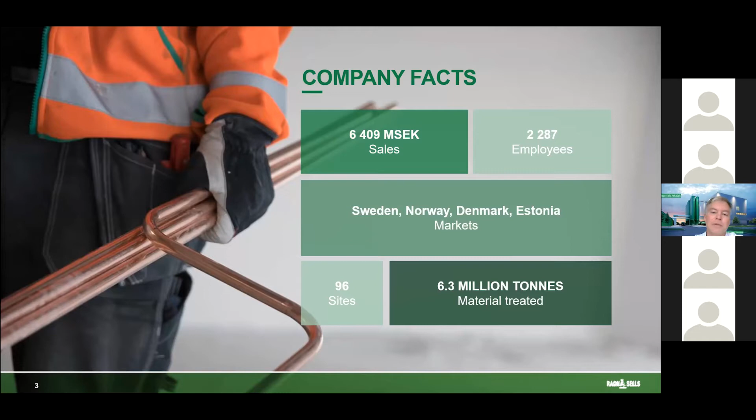Some quick company facts. We have a turnover of some 600 million euros, 6 billion Swedish kronas. We are active in Sweden, Norway, Denmark, and Estonia, and we handle some 6 million tons of materials each year. We do lots of stuff. We are operating landfills, we are collecting waste, we are recycling paper and plastics and all that sort of stuff, and working with hazardous materials in general, really.

We are working with a few basic principles when we are developing our technologies. We need technologies that really reduce the need for use of virgin resources. And we also want them to decontaminate the circular flows. We have lots of stuff in circulation that we need to take out of circulation. So the waste or incineration business is really the kidney of the system. That's one place where we can take out unwanted stuff. And we also want our solution not to push any debts to future generations.

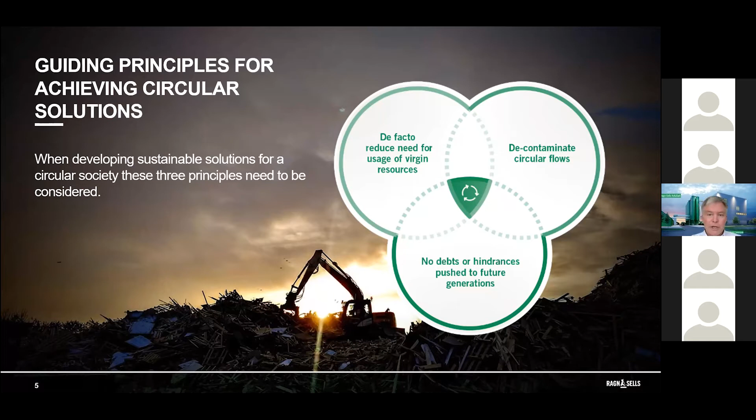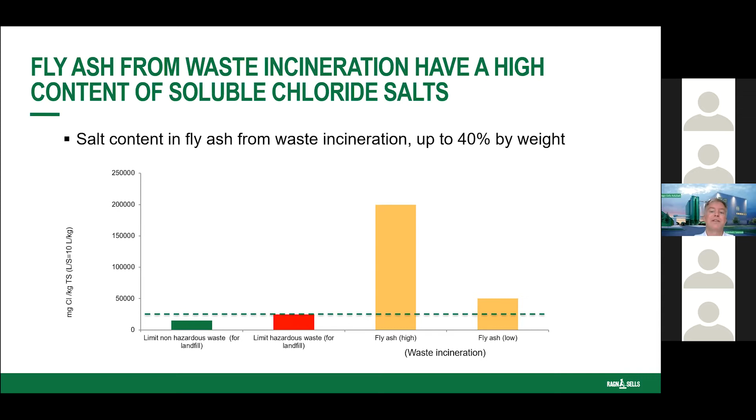As you know, one of the problems with fly ash from waste incineration is the high content of salts. On the left here, you see the staples are the limits for landfilling of hazardous waste in Sweden and the European Union. And the yellow staples are actually the salt contents in some of the ashes. So this is, of course, a big problem, but also a possibility if you like to recycle stuff.

The challenge that we had to overcome is we have a big site west of Stockholm, Högbytorp. It has a good location for ash treatment since it's in the middle of quite a few incineration plants. But we have a freshwater recipient, so we can't discharge any salty water or any other contaminated water, of course, into this water body. So we chose to focus on the chloride salts rather than the heavy metals. We needed to create an off-site solution to meet these needs of our customers. Most of the plants are maybe too small to have an on-site solution, or they don't have enough space to have one.

And we also needed a technology. Since we are not ash producers, we needed a technology that can handle a different feed of ashes over time, since we are subject to public tendering. I mean, the contracts come and they go away and the ash mix is changed. Also, our customers change their fuel mix, and maybe changes in the flue gas treatment technologies due to regulations and other demands will change the quality of the ashes. So we needed a very robust technology.

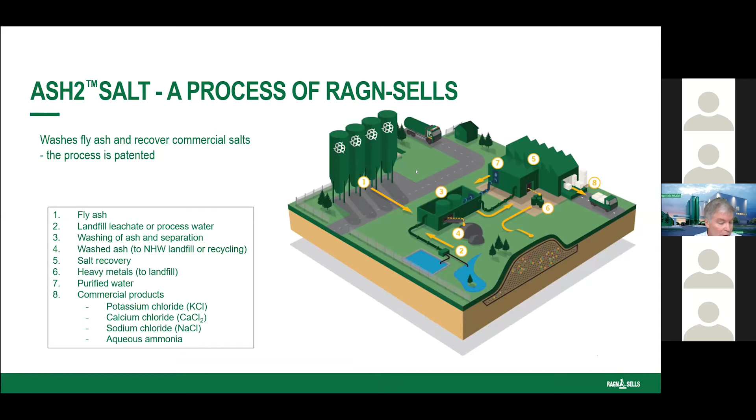Simplified process. The first step is the actual ash washing, the washing of the ash. We wash with water. It's a high pH process. In this step, it's a well-known technology, and we have also teamed up with a very experienced partner in this. I'll come back to that. And we produce the ash residue, the washed ash, so to say, and then we take out some of the contaminants to make the next step possible.

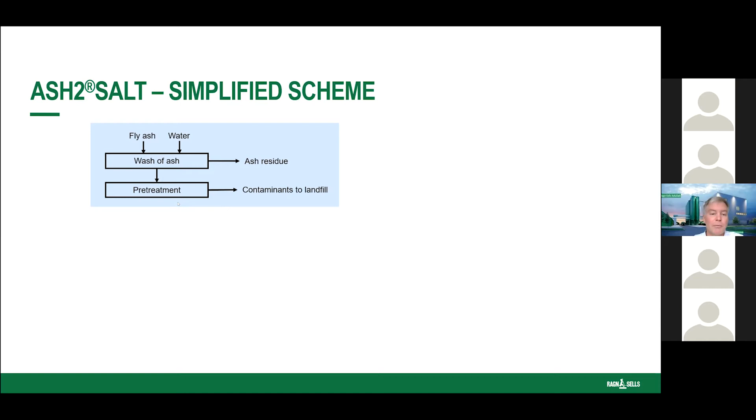Next step, we come to the first of the ash to salt operations, and that's evaporation of this pre-treated brine.

That was a hard sentence. I need to take some water.

This is the evaporation step, and in this step we create ammonium sulfate, and we also separate calcium chloride. And how do we do that? We do that by using the fact that in the mixture, the calcium chloride and the sodium chloride and the potassium chloride, which are the 3 main salts in this brine, have different solubility in each other at different conditions. So we can use that in a very ingenious process that is patented by EasyMining.

And so we can separate the calcium chloride, and on to the next step, we have a mix of potassium chloride and sodium chloride. So once again, we use a solid liquid separation cycle, also taking advantage of the fact that these salts have different solubilities under different conditions. And that's really the process. There's lots more to it, of course. But this step number 2 is the only evaporation operation we have, and thus it's very energy efficient.

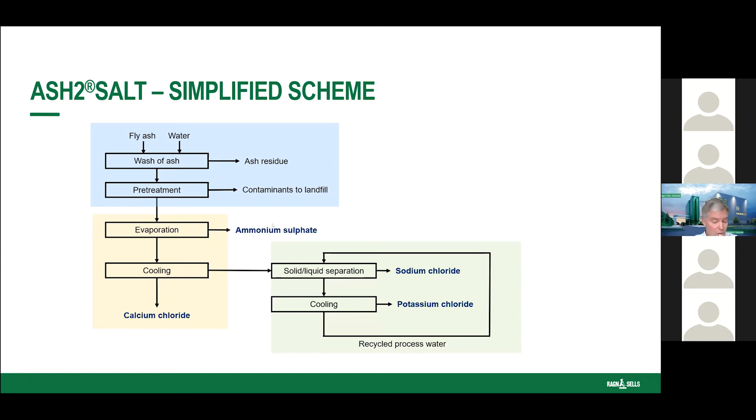What do we produce? We produce, of course, lots of ash wash residue, which could be landfilled as a non-hazardous waste under EU regulations, or it could be used, hopefully, as a process chemical in some industry. The potassium chloride could be used as a fertilizer, of course, or maybe some industrial chemical. The calcium chloride is mainly used for roads, dust control and de-icing.

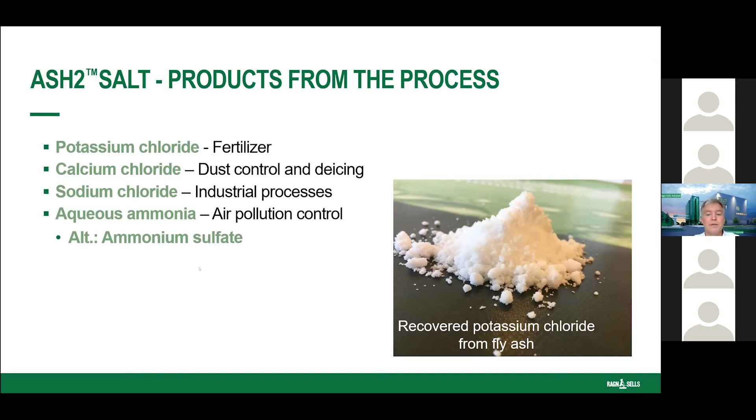Then we have the sodium chloride, also used for roads, but we are aiming for industrial processes, a bit more noble use of this very pure sodium chloride that we produce. And then we have the aqueous ammonia or ammonium sulfate, and that's a good story. We can recirculate some of this back as air pollution control agent to the plants that produced the ashes. We also established a partnership with a very experienced and competent partner in the salt market to help us market the salts from this plant we're building.

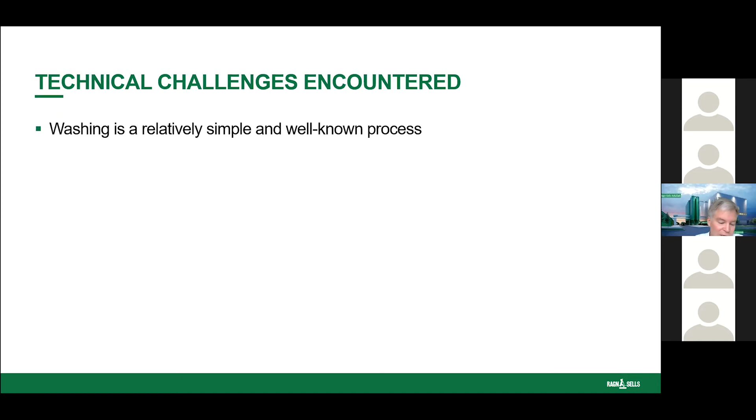Michael gave me a few specific questions to focus on. I think I already answered most of them, but I'll repeat for clarification. The first step, washing, is quite simple and well known. And we have teamed up with the partner Hitachi Zosen Inova, which has massive experience from washing of ashes, and is also the name behind the FLUWA technology that will be presented later. So the technical challenge was the salt splits, as we didn't find any that met our needs. And this was the main challenge, to invent the energy efficient technology.

I don't think energy will be cheaper in the future, and use of waste heat will come at a price. There will be no waste in the future, hopefully. It's only one evaporation step, so we use the saturation and crystallization cycle instead. So that's energy efficient. We didn't want a technology that needs lots of chemicals, hardly any actually.

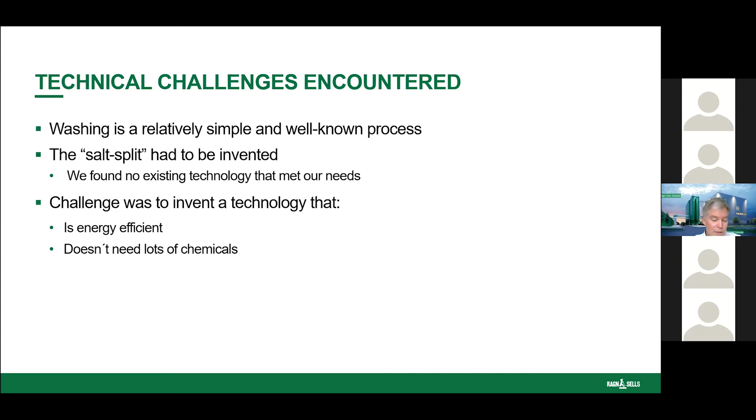Washing with water was the solution to that, and it reduces the chemical handling. We also needed it to be insensitive to the proportions in the salt feed, and the technology actually takes care of that itself. It's very robust and it separates the salts due to the Ash2Salt patent.

And we needed to produce clean salts of commercial quality, so we needed to take away any unwanted substances from the salts. Since we don't want to produce any mixed salt brine for maybe road use, we wanted pure salts that really replace virgin material.

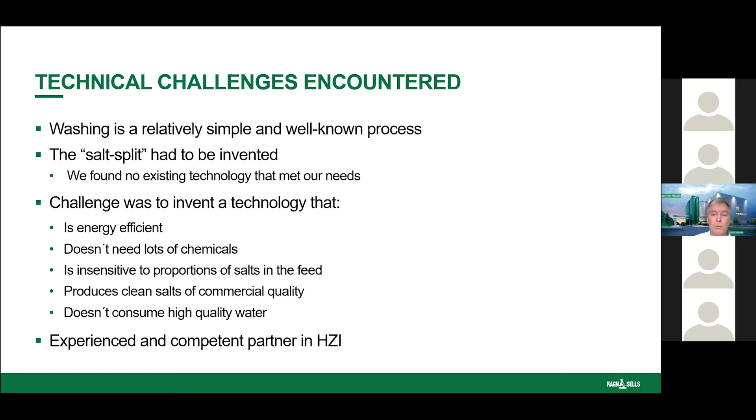And also we didn't want it to consume high quality water, so we had to build in a water cleaning system, not only to not contaminate the salts, of course, but also not to have to use pristine water. We teamed up with HZI to accomplish this; they actually realized the technology, and it has worked out really well so far, and in the future, we trust.

Other technical challenges, of course, when you're working with these materials: we have the high pH level. We have formation of H2, as some ashes produce quite a lot of hydrogen gas when mixed with water. We don't want to blow the factory up. We have to remove the unwanted substances from the salt, before we go into the salt cycle and also during the salt extraction.

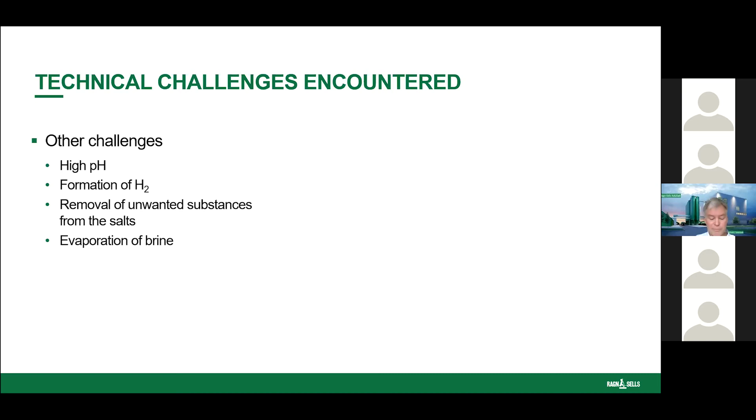And then, of course, we're working with high concentrations of brine, and it's always a challenge to work with evaporation in that. Going forward, we will, of course, have the problem of implementing this technology at full scale, but it's well-known operations applied in a novel way with an experienced partner. So we think we can

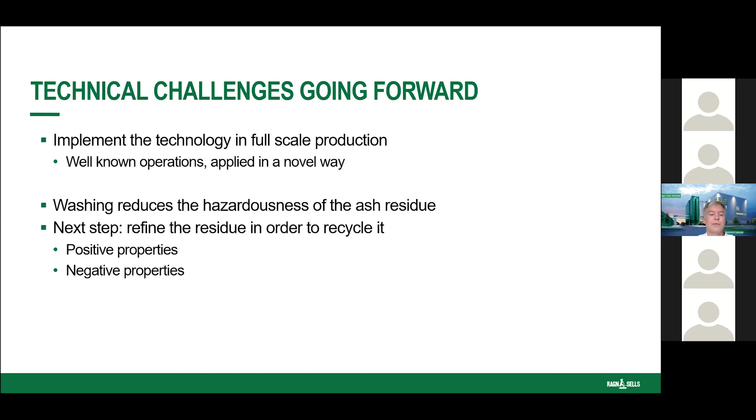accomplish that. And also the washing reduces the hazardousness of the ash residue, but it's not fit for reuse yet. Next step will be to refine this residue in order to recycle it. Washing with water gives us some advantages with positive properties and also some disadvantages with negative properties. But we're working on that. Hopefully we'll realize that as well.

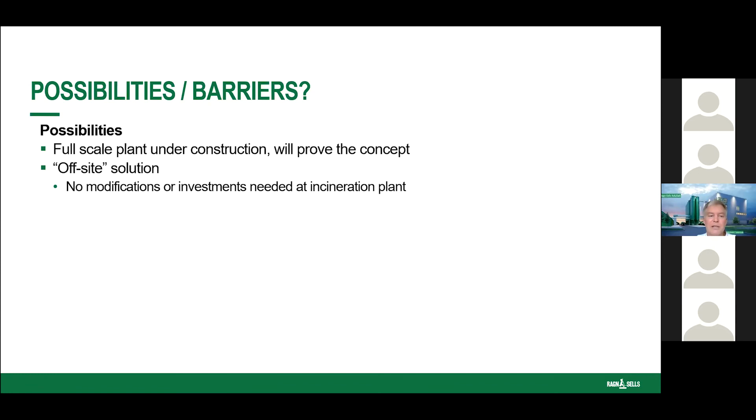Another question from Michael was the possibilities and the barriers. The possibility is that we have a full-scale plant under construction at the moment, which will prove this concept, hopefully. And it's an off-site solution, as I said, no modifications needed at the incineration plant, which we think will make it easier to implement this technology. It's a robust technology. We can handle any mix of ashes.

And also, there are lots of ash washing plants around, and the Ash2Salt technology can be applied to any of those. It has a negative climate impact, meaning good climate impact, since the climate impact from producing the salts somewhere is vanishing.

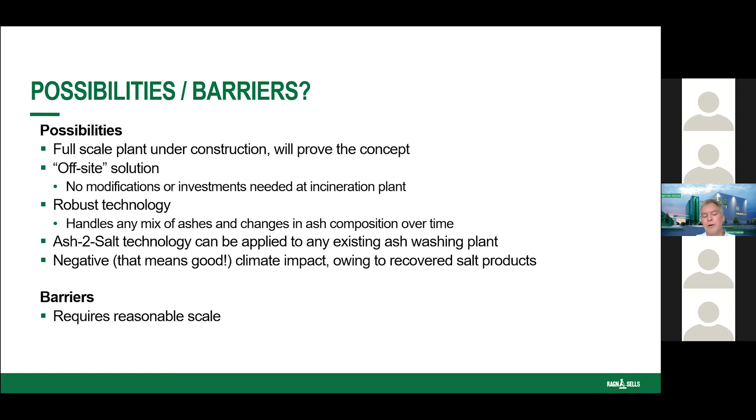Also some barriers: we need a reasonable scale. It has to be fairly big, maybe 50,000 tons of ashes. So for a remote location, maybe too expensive, and also on site at the incineration plant, it will be a bit too expensive. I'm running out of time, so I will be fairly quick.

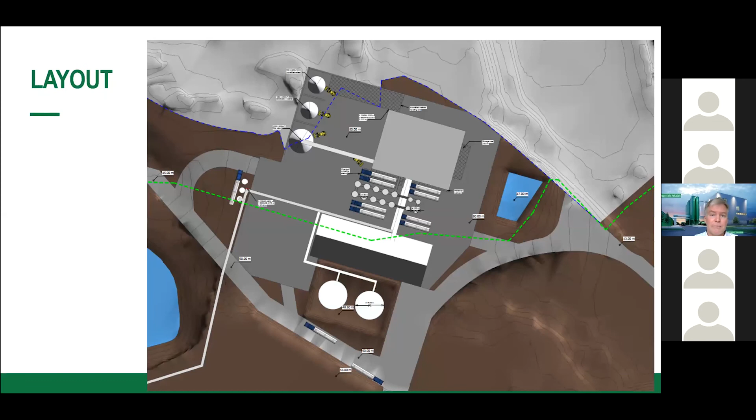We don't think we need any policy measures. This was another question. The future is already here, and we are building. Some general promotion of circular economy. We need a level playing field with virgin resources. That's about that. The layout. This is the construction site. Two weeks ago, we started groundworks. So it's actually happening for real.

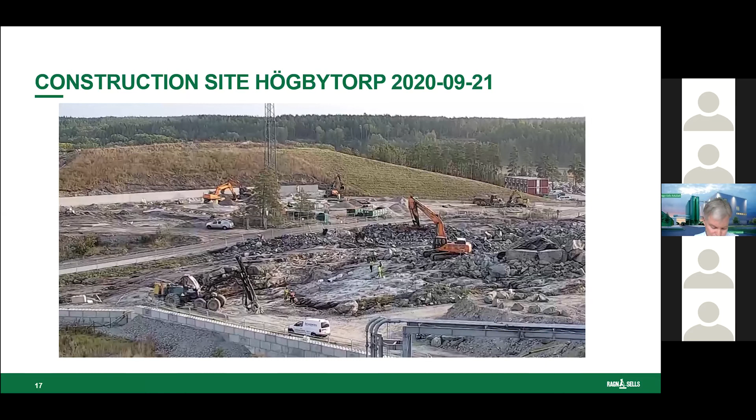And the project timeline is that we did the demolition before summer. We are now doing groundworks. We will start building the actual building and equipment lift in later this winter. It will be completed for start of the testing in a bit more than 1 year from now. And then we'll do the tests and performance tests, and then we will take over in August 22. So this is a timeline.

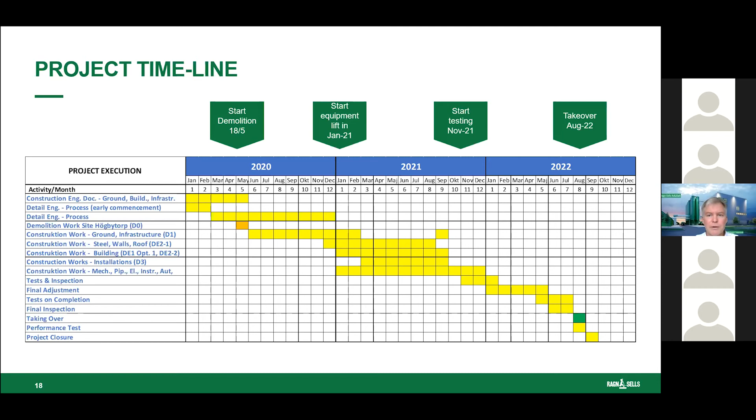Okay, I think that's about it. Thank you very much, Jonas. So several questions came in, and we just have about 5 minutes to go through them.

You have answered some of them already, but you answered that per today you cannot really recycle the residue with the heavy metals. That's a challenge you have to work on in the future, right? Absolutely, we're working on that, and we have some ideas, and our aim is absolutely to be able to recycle it. Yes. Yeah, to have a complete solution.

A question about the calcium chloride. Is there really a market for that? How easy is it to store it also? Yeah, we believe there is a market. Otherwise, we would have gone from one problem to maybe a larger problem. So now the analysis is we have a market, and as I said, we have a partner in the salt market, been there for quite a while, and they are confident there will be a market for the calcium chloride, at least for road use.

Yes. Good. Again, somebody is very interested in the dioxins. Do you do anything specific in the process about that? Yeah, we have considered dioxins, of course. We are quite certain that they will end up in a certain place, and we'll take care of it. We are actually in a race with other technologies at the moment, and we think we're on the leaderboard. So I can't be too specific, but yes. No, I understand. But yeah, it's on your radar, of course.